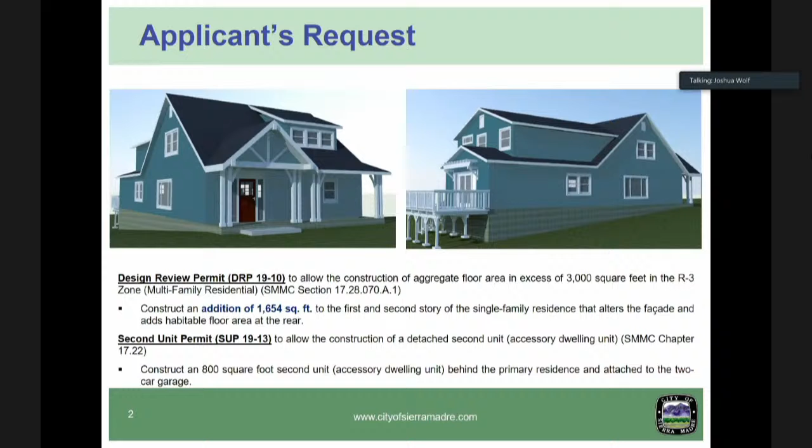Good evening, Commissioners. Tonight the Commission will be reviewing Design Review Permit 19-10, in conjunction with Second Unit Permit 19-13, for 170 West Montecito Avenue. Tonight the Design Review Permit will be contemplating the construction of an aggregate floor area in excess of 3,000 square feet on an R3 zone. The construction will include an addition of a total of 1,654 square feet to the first and second story of a single-family residence that alters the facade and adds habitable floor area at the rear. There will also be an accessory structure built for a garage, as well as the accessory dwelling unit.

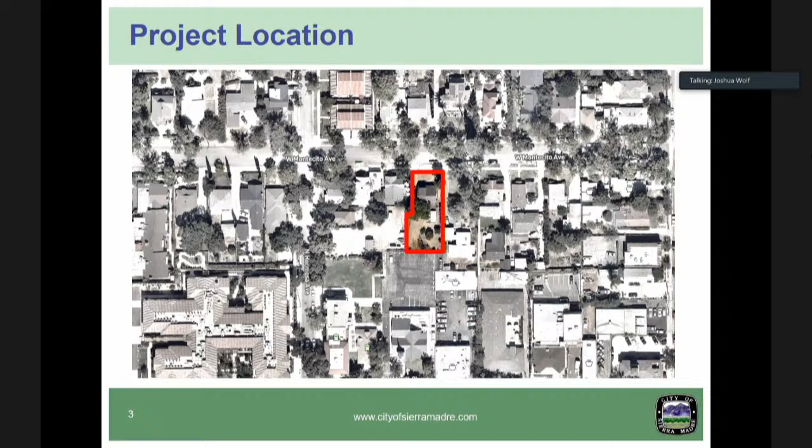Project location here on Montecito, close to the corner of Hermosa Avenue, just above the boulevard. Directly north of the old North Church at the parking lot, east and west of R3 zoned lots, and surrounded by commercial uses.

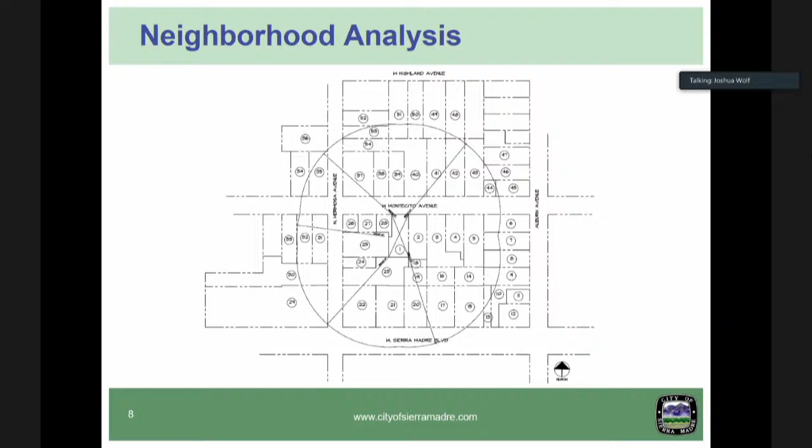So here we have the existing site plan, and as you can see towards the left of the slide, there's a lot of open space room for building. We have the wood deck here at the center of the property. This is going to be demolished and replaced with the area of the addition as well as a brand new deck. And as I pointed out earlier, there's a lot of open space area. There are two citrus trees proposed to be removed for the location and siting of the garage and accessory dwelling unit.

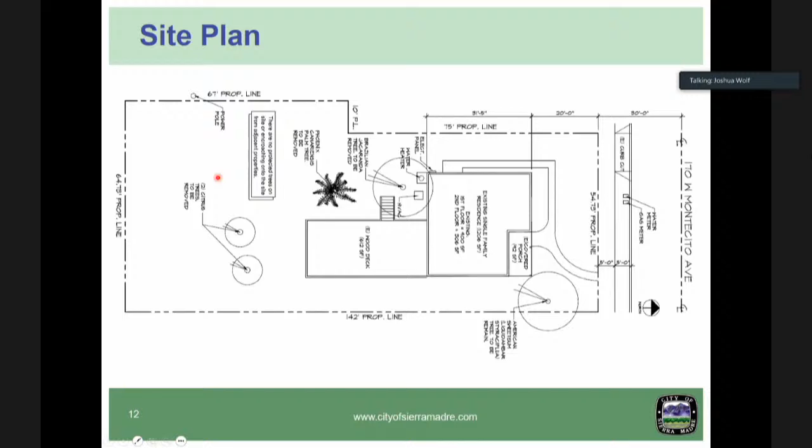And moving on, as you can see, we have the accessory structure here at the rear of the property, with the garage here at the end of a newly constructed permeable paver driveway. And we can see that the replacement of that deck at the rear is by addition to the residence as well as a new wood deck. I'd also like to point out that the existing front porch is going to be enclosed for living space, and then added on to that is a full width front porch.

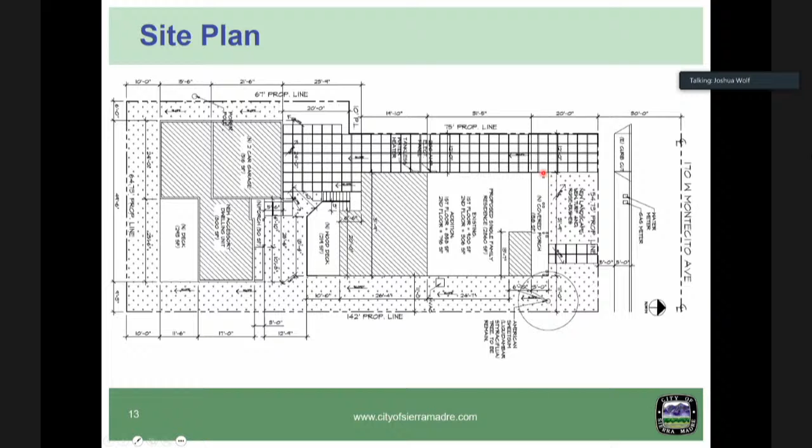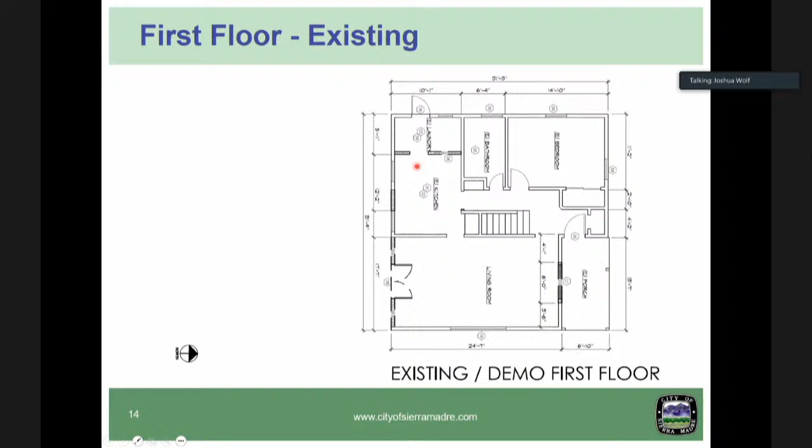So here we have the existing first floor, it's also a demo plan. It's a little bit hard to see, so I'll just try to describe this. What's being retained is the bedroom, bathroom, stairs, and portions of the living room. Basically this whole wall here will be demolished to make room for the addition. The kitchen is going to be completely new, and the laundry is going to be completely reconfigured.

So as you can see, beginning with the living room, we have an expansion towards a more open concept floor plan with the addition of a dining room and family room. We have the addition of a powder room here, pantry in conjunction with the reconfiguration of the laundry room. This also encloses the side entrance here. And then we have the all-new kitchen, and at the rear we have the new deck with the new stairs down to grade. At the front we have the foyer that was enclosure of the existing porch, and then at the front facade we have the new porch at full width.

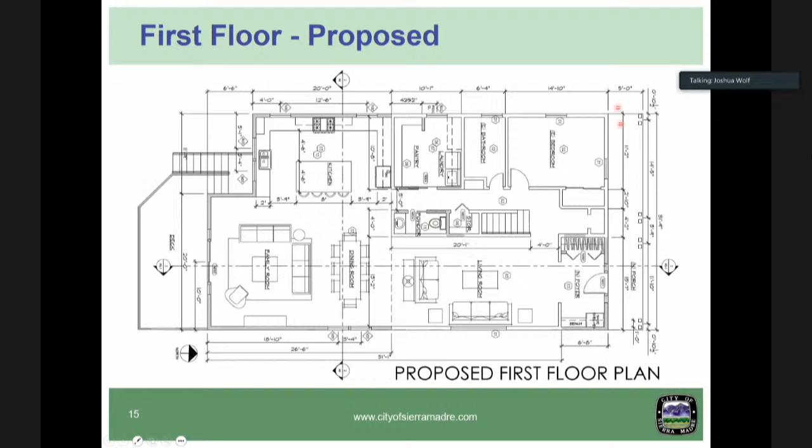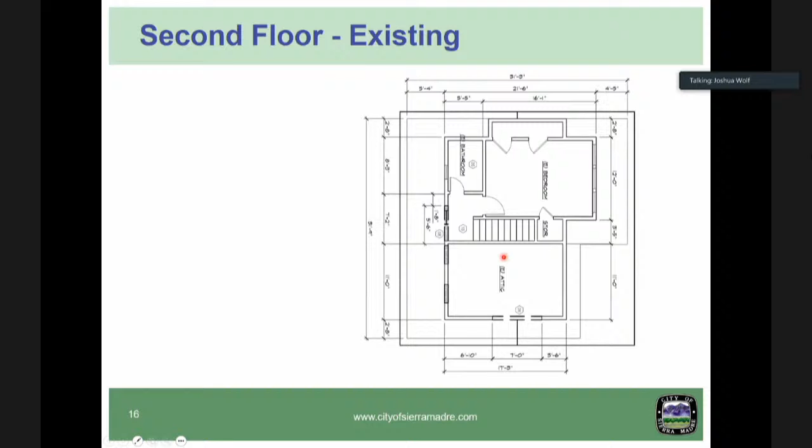From the second floor, most of what we see here is going to be retained. The bedroom here is going to stay existing. The bathroom will be enlarged, and the attic space will be converted for use as a bedroom. So here you can see this is expanded. The seating area here you can see is popped out, and the bathroom was enlarged to provide for sink space, and then the majority of the addition at the second floor here is for a master suite.

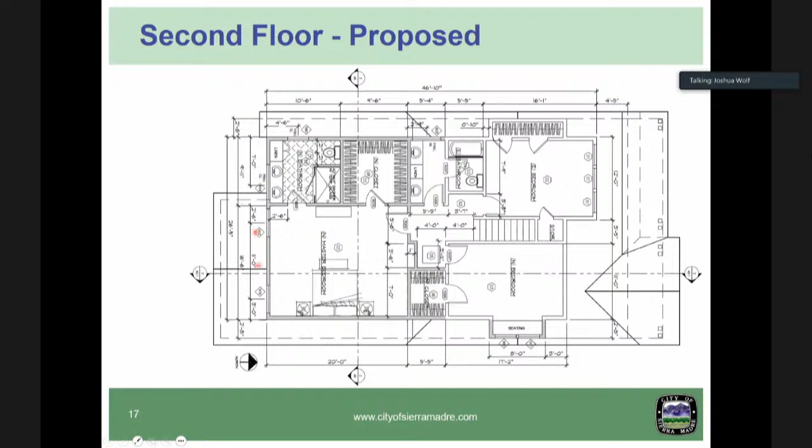Our north elevation shows existing conditions here, with a very large roof and a dormer pop-out for the bedroom at the second floor.

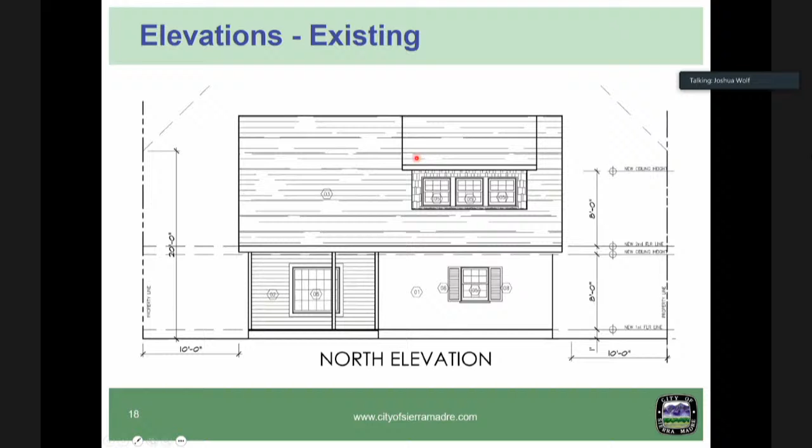Here is our new proposed north elevation, with material changes being stucco removed and replaced with vertical board and batten siding, shingles changed to horizontal siding, and new windows to match in style with existing. There will be all new windows and all new doors. Style will match existing, but everything will be comprehensively new, especially for the additions to match.

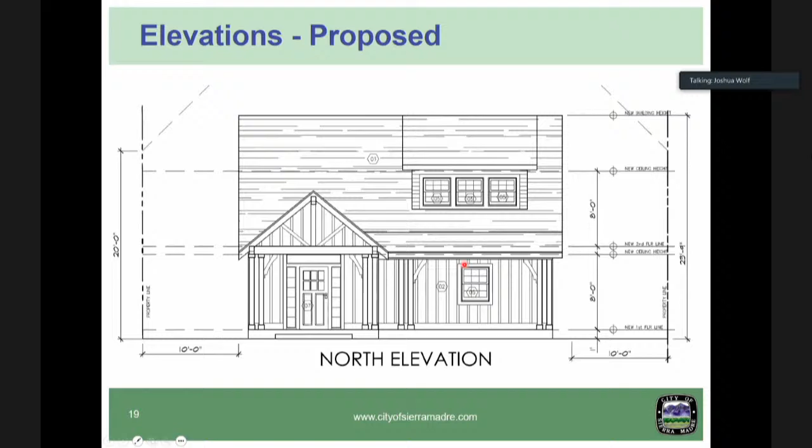From the west elevation, this is going to show the most dramatic change, here at the front. You can't see the porch here, but that will be expanded upon. Here we can see a deck, and the elevation would actually continue this deck a little further. Our proposed elevation expands upon that. So from the front we can see the expansion of that front porch here, and there is a gable end.

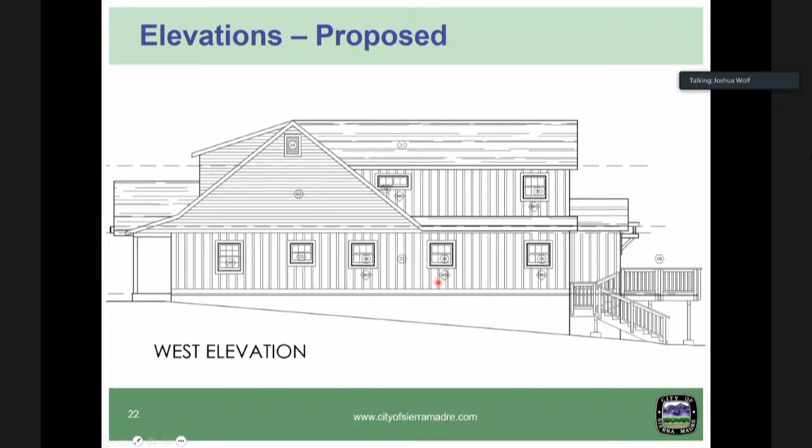And at the rear we have that entire second floor expansion along with the first floor expansion. And just a colored rendering of that elevation.

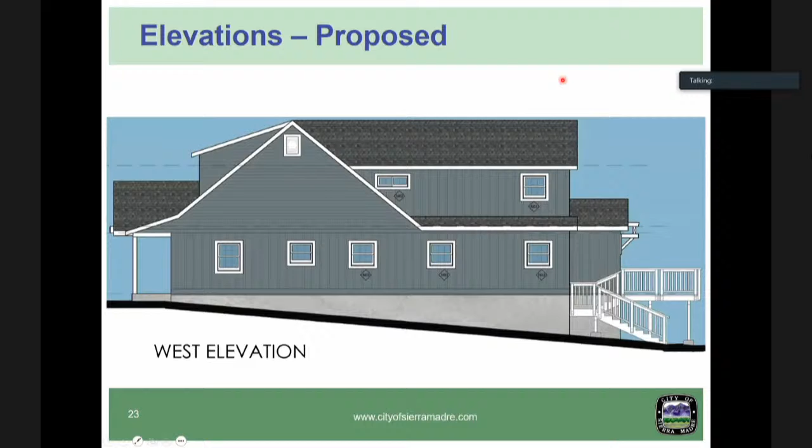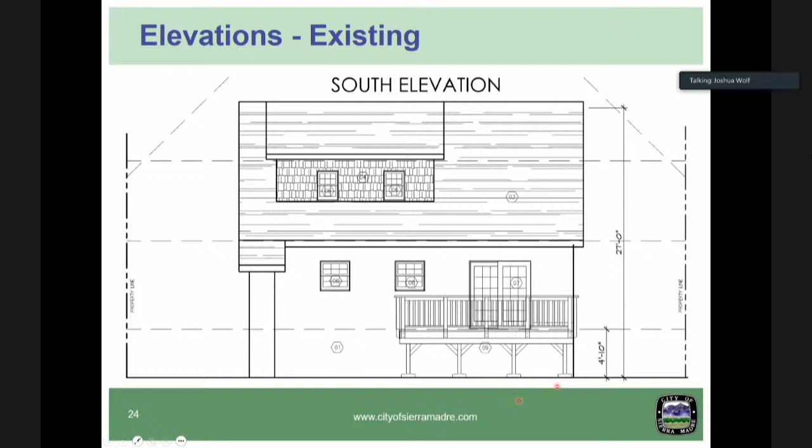Our existing south elevation, again we're going to be replacing materials here, stucco here, full demolition of this porch, and entire removal of this wall.

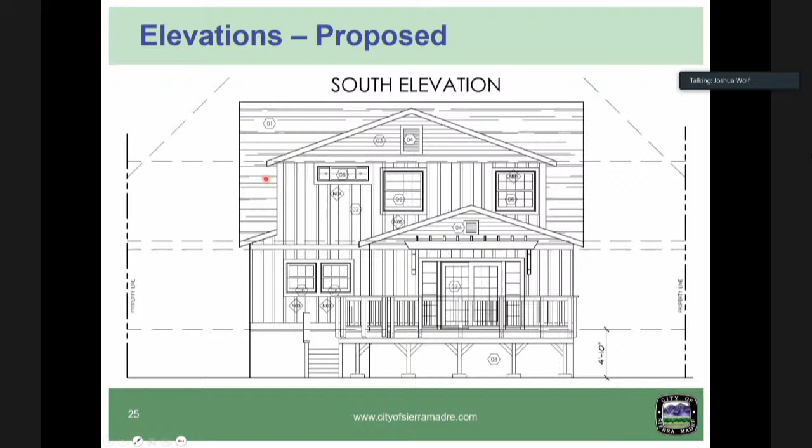As you can see, we have a new facade at this side. This will be a new porch entering onto the family room, with the kitchen on the left and master suite above on the second floor. And just a colored rendering of that.

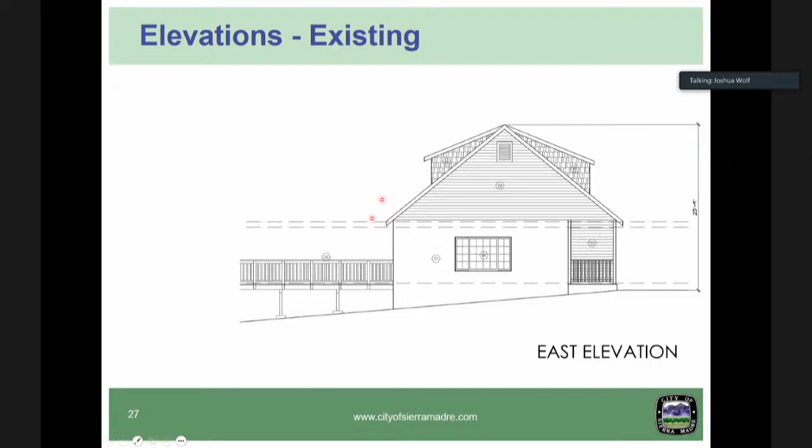Our east elevation, similar to the other side, here is where the living room is located. And here's where the existing porch is located, which will be enclosed. And of course we have the full addition to the rear, along with the new deck showing, and the front porch expansion. This space will be the dining room, and beyond will be the family room.

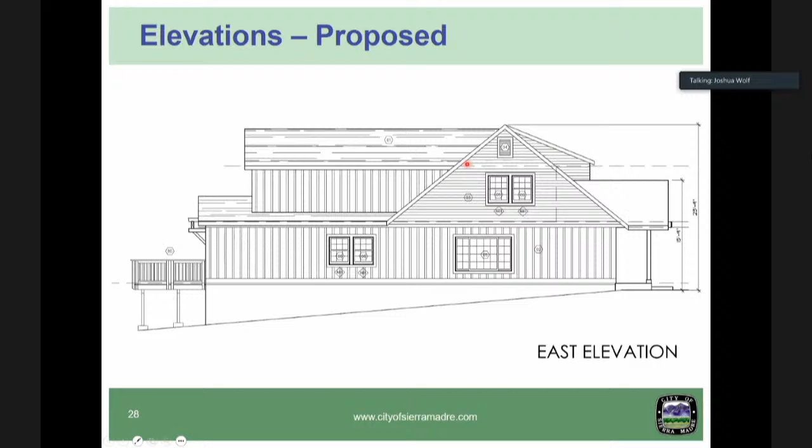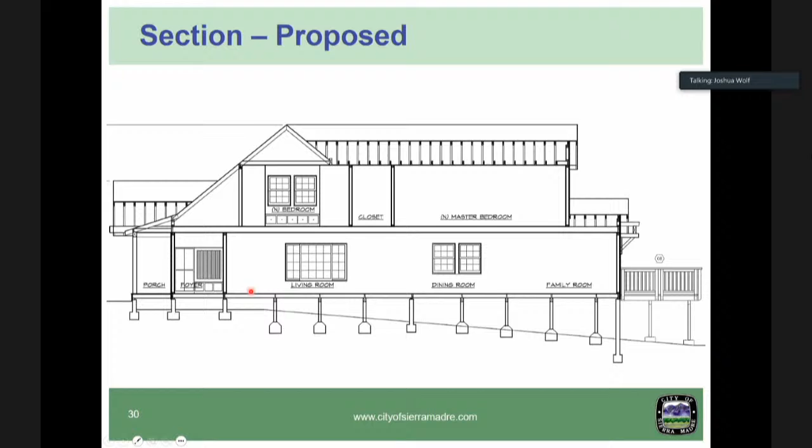So we have some cross sections here just to demonstrate the raised foundation, and another cross section here, more towards the south.

I'll also point out that the portion of this addition is 27 feet in height from grade to ridge of this roof. It's actually below the existing ridge of the roof, but because the grade changes here, it exhibits a greater height, which is compliant with R3 code, allowing for a total 30 feet height.

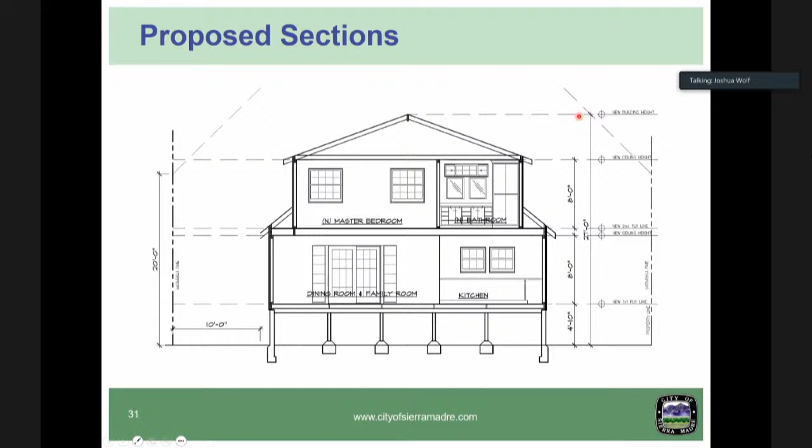And here we have the floor plan for the garage and ADU. The garage will accommodate 2 covered spaces, and the ADU is compliant with the standards, providing for bedroom space, kitchen space, and bathroom.

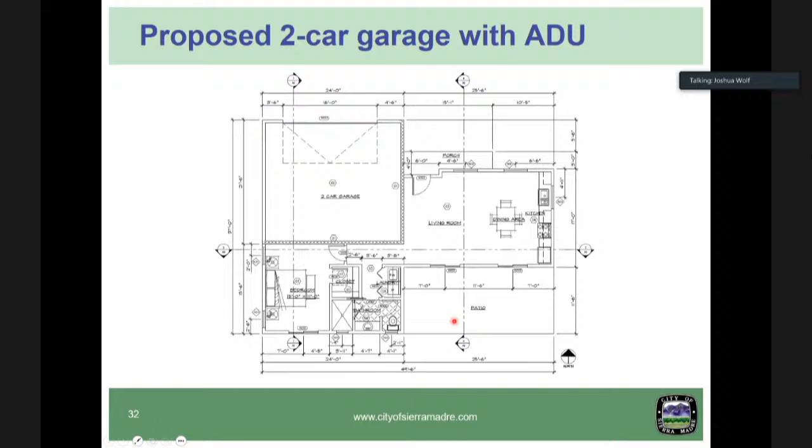Here we have elevations. This is the north elevation with entrance to the garage, door on the right with a garage door on the right of that elevation, and the entrance to the ADU at the center.

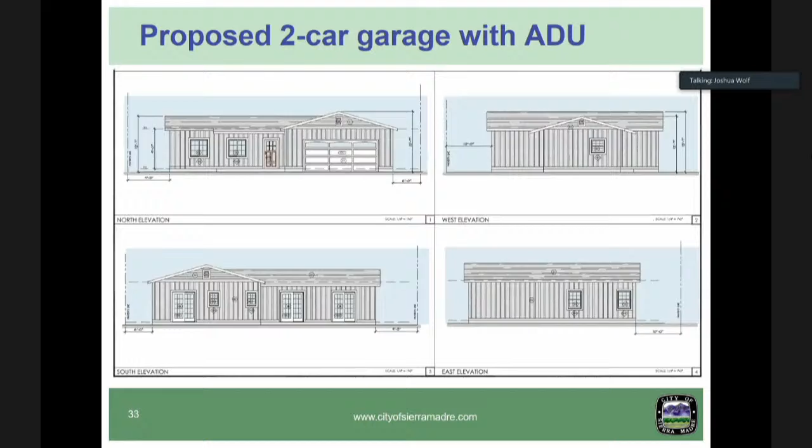West elevation showing here, east elevation on the bottom right of the slide, and then south elevation to the bottom left of the slide. And then just some colored renderings to show that all materials will be consistent with the design of the main building.

Here we have some 3D renderings to demonstrate more of what the project would look like. Front elevation showing open gable and front porch.

And to the side, here we have the rear where the deck would be opening into the family room. This part here is the living room.

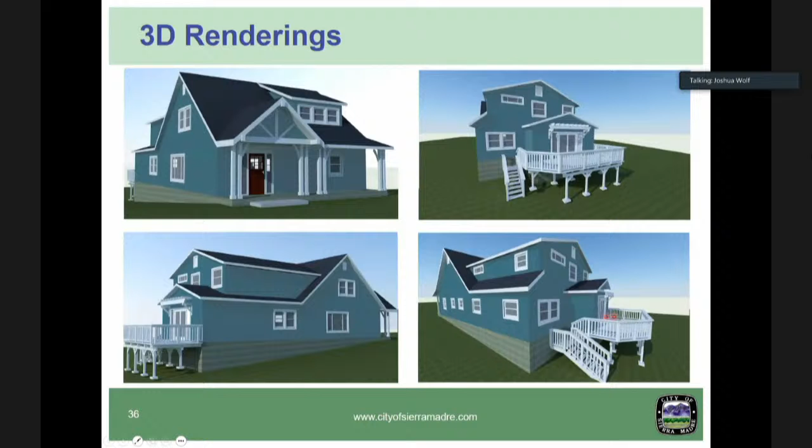And here we see more of the deck and its relation to the grade. On the bottom right, we have the other side, showing the extension of the addition.

So to make findings for the design review, the proposed project is consistent with the general plan designation of residential medium high density, and preserves and enhances the existing single family home. The majority of the project is located at the rear and will not unreasonably interfere with the use, possession, and enjoyment of surrounding and adjacent properties.

The proposal at the front will enhance the residential character of the neighborhood. The height, bulk, scale, mass, and siting of the proposed project is compatible with the existing neighborhood, landforms, and surroundings, in that the neighborhood contains a variety of uses and structure types.

The proposed two-story project reflects the scale of the neighborhood and does not visually overpower nor dominate the neighborhood, and is not ill-proportioned.

The proposed project, being 27 feet in height, neither unreasonably interferes with public views or the views and privacy of neighbors, nor does it produce unreasonable noise level or cause material adverse impacts.

The proposed project exhibits a comprehensive farmhouse style around all elevations of both structures, and each structure is consistent in style. The proposed project is not seeking relief from development standards, so finding 7 does not need to be made. Additionally, because this is an R3 zone property, I believe finding 8A through F does not apply.

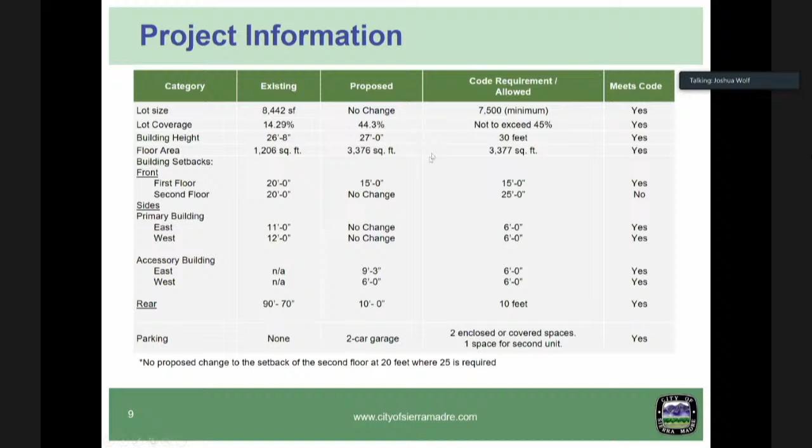So that portion of the project is within development code standards. However, the portion that exceeds that, which I don't believe would be contemplated, is the front porch and second unit, or accessory dwelling unit, as it's now called.

Well, why are we not counting the ADU? Our code is very clear that the ADU has to be within the square footage. If you look at code section 17.22.050A, the second unit ordinance, it says the total floor area of all buildings on the lot, including the accessory dwelling unit, shall not exceed the maximum floor area otherwise allowed in accordance with this title.

So we may have a different understanding. I can answer that question, actually. So because—go right ahead. Thank you. So under the state ADU law, subdivision E, it says that—

Oh, my lights turned off. It says that projects that are within 800 square feet or less, ADUs that are within 800 square feet or less, will be approved without regard to underlying zoning conditions. In this case, the project is 800 square feet, so it meets the subdivision E requirement. So we can't prejudice the project by applying that zoning standard.

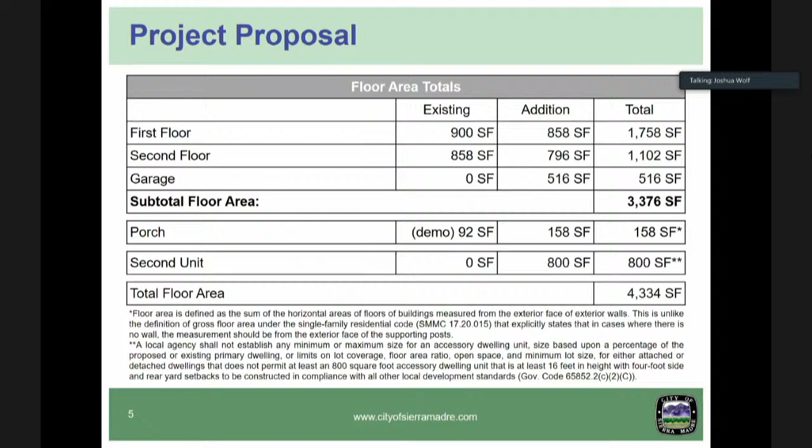Are there other questions of staff? Would the applicant like to make a presentation?

No, not at this moment. I'm the designer, Ricardo Figueroa. I think Josh pretty much explained everything that we're planning to do. I don't know if the homeowner has a comment.

Hello, I'm Lynette, the owner of 170 West Montecito. For the most part, we've been in the process trying to get this design and following every request that the city has asked us for the past 3 years. And we followed through closely with Josh, and from what we were told, we are within the zoning code. So I don't know what else is needed for us to move forward.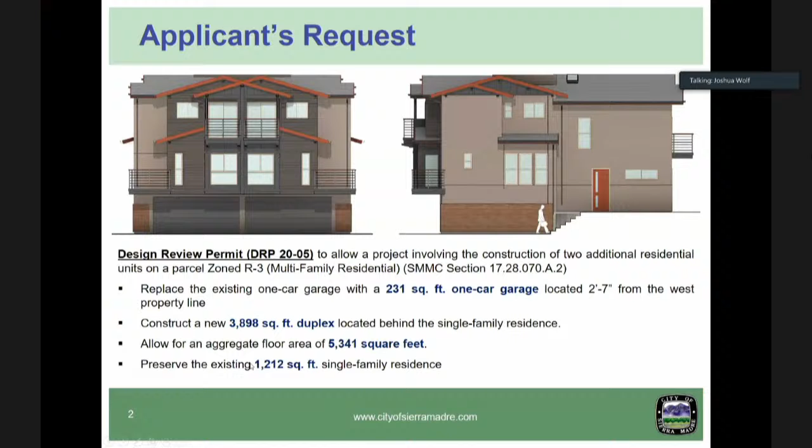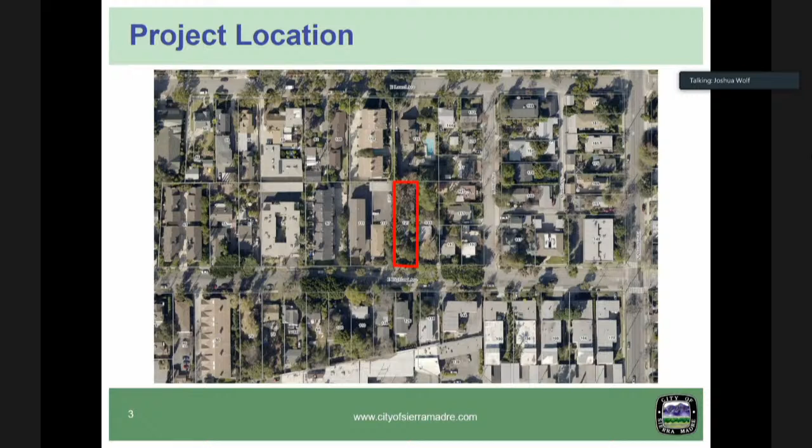The project is located on the north side of Highland Avenue, east of Baldwin, and near the intersection of Merrill Avenue, closest major street being Mountain Trail Avenue. All properties surrounding are either R3 residential or 2-family residential, noted here by the golden zones.

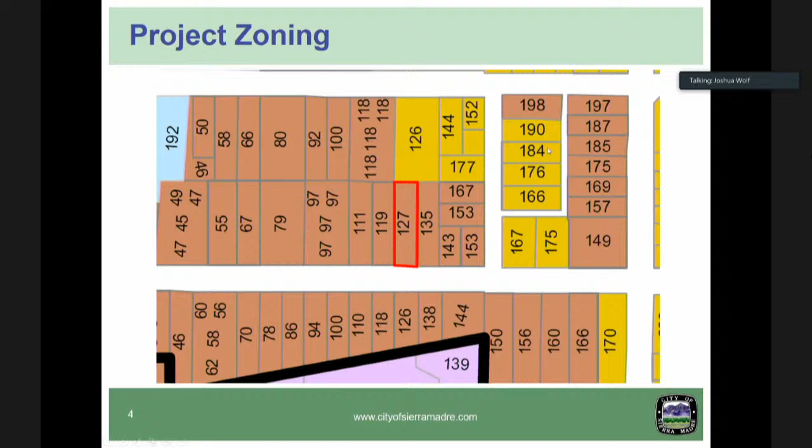So in summary, the project will be preserving the single-family residence. The existing garage will be demolished and rebuilt at 231 square feet in a different location. This leaves us a total of 1,443 square feet here. The 2-family duplex residential area of 3,063 square feet with garage total area of 835 square feet, for that subtotal area of 3,898 square feet, all in total of 5,341 square feet.

At the north end, we have a 2-family residential property. There's substantial vegetation and a high fence to aid in the mitigation on privacy. As in the east, there's cypress trees here to help with impacts on privacy. To this property, there is a single-family residence.

On the south end is the remainder of the property. There is an oak tree there. This oak tree is proposed to be removed with the approval by the Public Works Department on a mitigation of a 5-to-1 replacement ratio, with location to be determined by the Public Works Department.

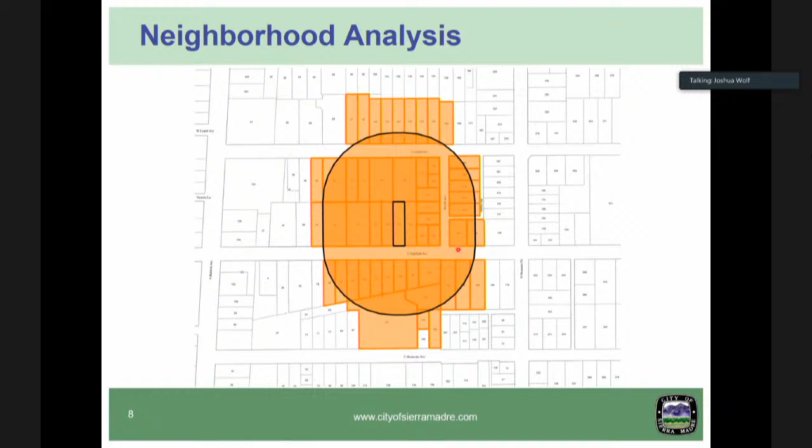And like our last project, the neighborhood analysis will include a variety of not only single-family but multifamily residences, and some industrial areas here. The problem with the neighborhood analysis is that it includes the square footage for units on multifamily residential areas, and it was very difficult to come to a conclusion on the total square footage per property and comparing that to total square footage on this property, also comparing square footage of each unit to each unit where there's also single family units. So this is largely disregarded as part of fitting into the neighborhood, and we'll look more at the design of the project.

So I suppose I should go at this more in depth. So our lot size is not changing. It is a tier 3 lot, 8,500 to 11,000 square feet. Building coverage does allow for 60%. Normally this would allow for 45%, but because they are incorporating permeable pavers, they are allowed an allotment of an extra 15%, so that they can go up to 60%. They are only reaching 57.9%.

Building height, they are allowed 30 feet, and they are building to 30 feet. Their floor area ratio, they are allowed 55% or 5,267 square feet. As you can see, it does not meet the code. This is a difference of roughly 75 square feet or 0.7% above what is allowed.

As for the setbacks, our front is not changing as part of the effort to preserve the existing single-family residence, where they are otherwise allowed 15 feet at the first floor and 25 feet at the second floor. From the sides, they only need 10% of the lot width, or 5 feet from each side. They are providing, for the duplex itself, 5 feet and 1 inch from each side. However, for the one-car garage being built for the existing residence as a replacement, it is only located 2 feet 7 inches. This is due to the fact that it would otherwise not work in that location.

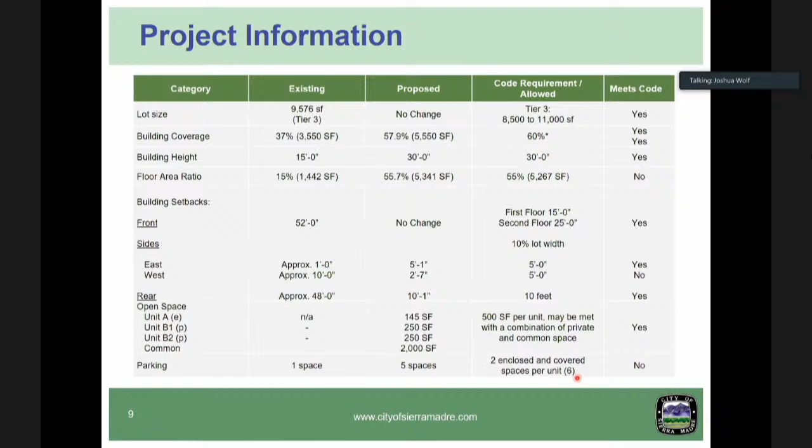I just outlined the same kind of relief of development standards for the preservation of a single-family residence on the site. The Commission can consider some relaxation of setbacks and other zoning requirements for that purpose.

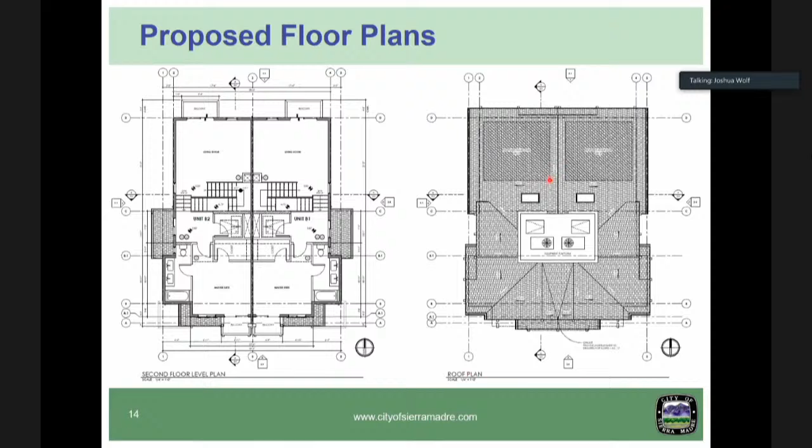For our elevations, we start with the potentially most publicly visible elevation, the south elevation, where we can see more of what the architectural design looks like.

The choice in colors for the overall building was selected in an effort to work in harmony with the existing single-family residence while also utilizing earth tone colors. A modern craftsman style was selected so that all buildings on the property would appear to be one cohesive design, while still allowing room for differentiation through use of materials.

The majority of the building is clad in stucco of a light tan color, and all portions of the roofs, except where the mechanical platform and solar panels are located, will utilize gray composition shingle. These materials will blend into the surroundings while offering visual interest through different uses of materials.

First with the brick veneer wrapping the garage at the lower level. Next with the horizontal siding here as a darker color. Then with the board and batten under the gable ends on the roofs. And lastly, the more striking feature of the red trim fascia board.

This provides focus for the center and the top of the structure.

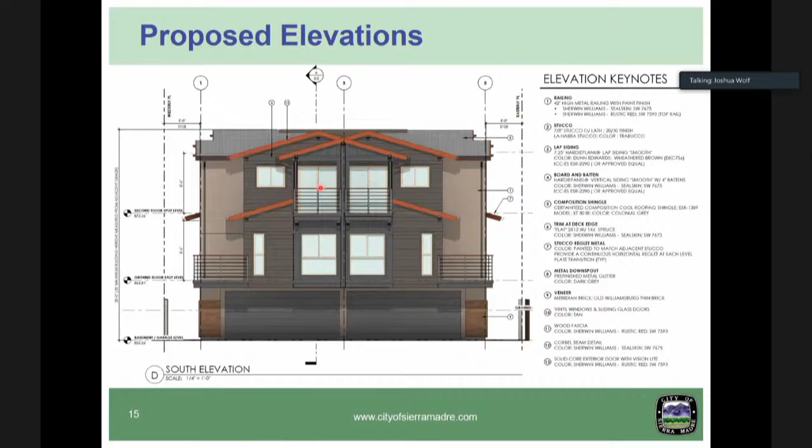At our side elevation, we can see the continuation of the wrapping of that brick veneer, continuation of the wrapping of that horizontal siding for that southern projection, and mostly clad stucco siding for that side. We can also see that the front door is the same consistent color with that trim to provide some extra visual interest here.

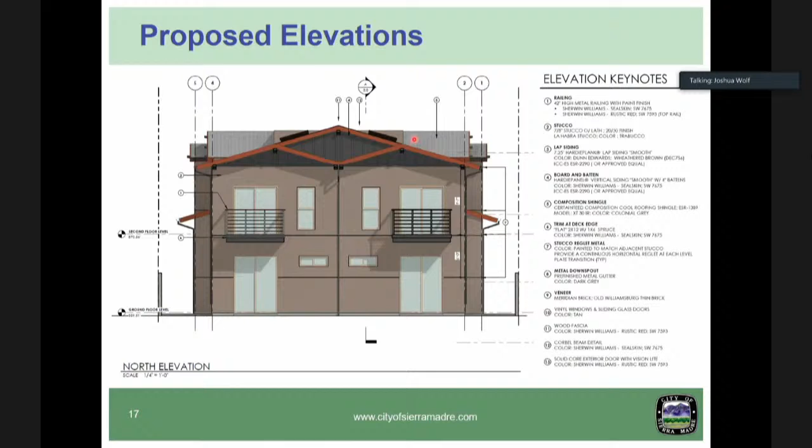On the north elevation, which is probably going to be the least publicly visible, we have continuation and consistency with materials used, board and batten under the gable ends, and stucco on the siding, as well as the red trim fascia board. The other side is just a mirror of its other side, using the same kind of materials, same wrapping, everything, showing a continuation of full wrapping of that siding as well.

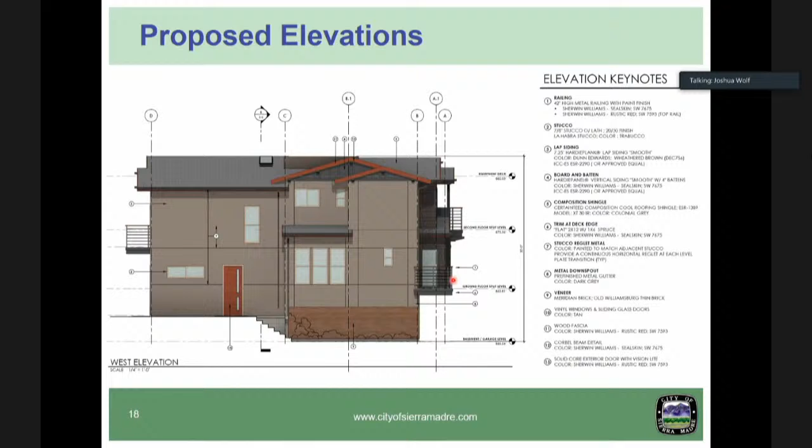From a section view, we can better demonstrate what each floor looks like. From that 2-car garage, you may have noticed there was a little alcove space here. This wouldn't be counted as floor area as it is only 3 feet 3 inches from that level to the ceiling, so it is just storage space in there. And again above, there's nothing below the room, it's just the room being demonstrated on that floor plan.

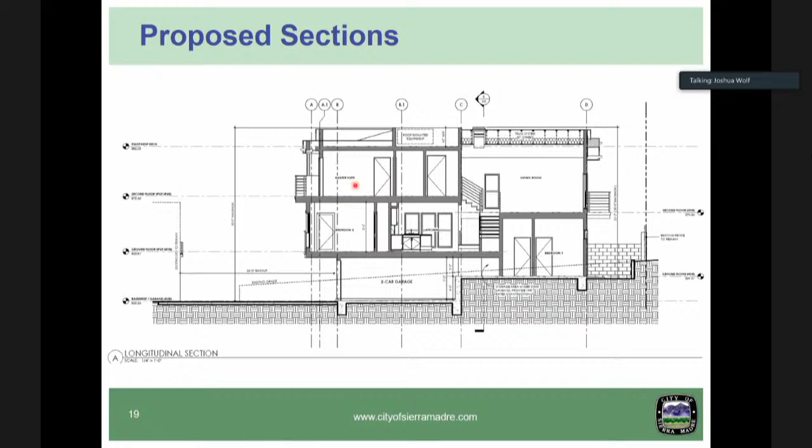Moving up another half level, we have that kitchen dining area with bedroom. Another half level, the living room, and then the final level, the master suite. From a cross section here of the transverse section, you can kind of see more of what the stairs configuration looks like.

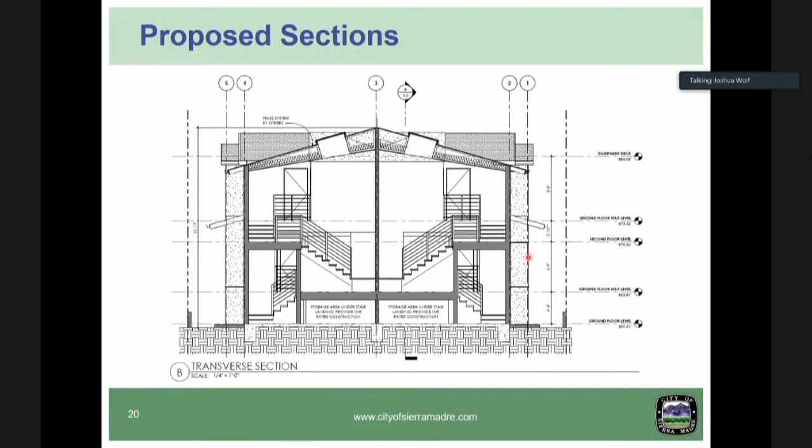And then just wanted to provide some extra detail for that garage being added to. It is also going to stay consistent in style to the building it's being attached to, as well as consistency in complementary features with the duplex being added.

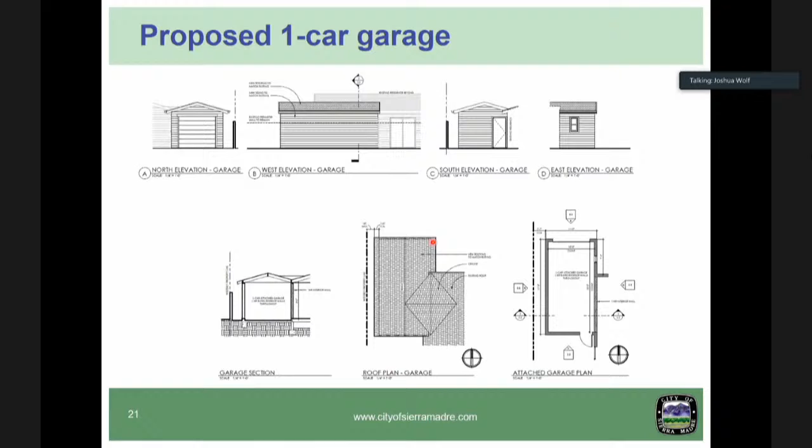Just some more detail to each material being used: a composition shingle gray for the roof, a board and batten siding for the areas under the gable. It's a little bit darker than the lap siding used at the southern projection. Light tan stucco, brick veneer, and then vinyl windows for use throughout all windows, and sliding glass doors.

Here we can see kind of a massing study. What was done by the applicant was to insert a 3D model of this within Google Maps to try to give some context for the surrounding area. Obviously, as we've seen from pictures, this is a little bit different of a situation where there's a building here. But this kind of remains the same, and you can kind of see it does pretty much fit within at least this context to the west.

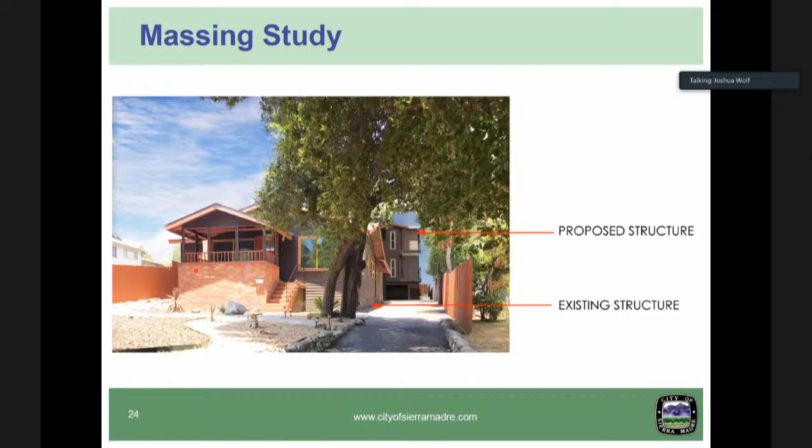From a front elevation, this is kind of what you would see as a rendering, but I have another image here ahead where you can see more detail from at least the driveway of what it would look like at street level, and also with a comparison of the existing single-family residence. And just some more 3D renderings to show you what it would look like, with some more context to its surroundings.

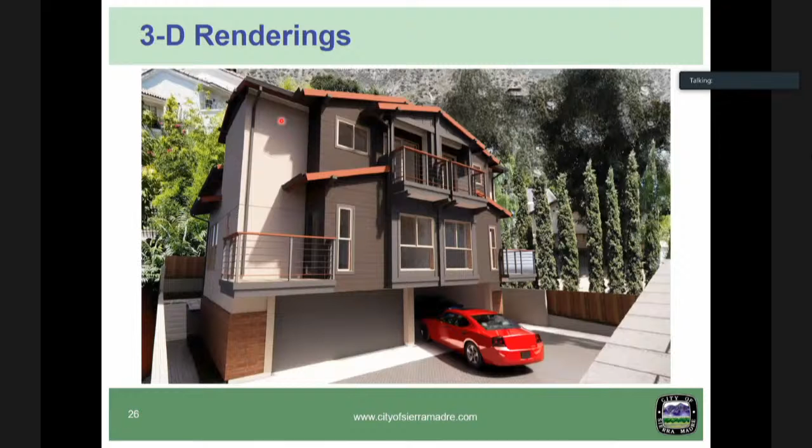So for this application, the following findings need to be made: that the proposed project is consistent with the general plan designation of residential medium-high density, as the project preserves the existing single-family residence. The proposed project is in the rear with little visual impact to the public view and will not unreasonably interfere with the use, possession, and enjoyment of surrounding and adjacent properties. The height, bulk, scale, mass, and siting of the proposed project remains similar to the existing residence from public view and is compatible with existing neighborhood, landforms, and surroundings.

The proposed project - I'm sorry, that should not say single-story project - reflects the scale of the neighborhood and does not visually overpower or dominate the neighborhood and is not ill-proportioned. The proposed project does not unreasonably interfere with the public views or the views and privacy of neighbors, nor does it produce unreasonable noise levels or cause material adverse impacts.

The proposed project exhibits a modern craftsman architectural style, is a coherent project-wide design, and is complementary to the existing single-family residence, especially in areas where it is not visible from the public view. And finally, the proposed project is not actually seeking relief from development standards for additional height, although it is seeking development standards for different reasons.

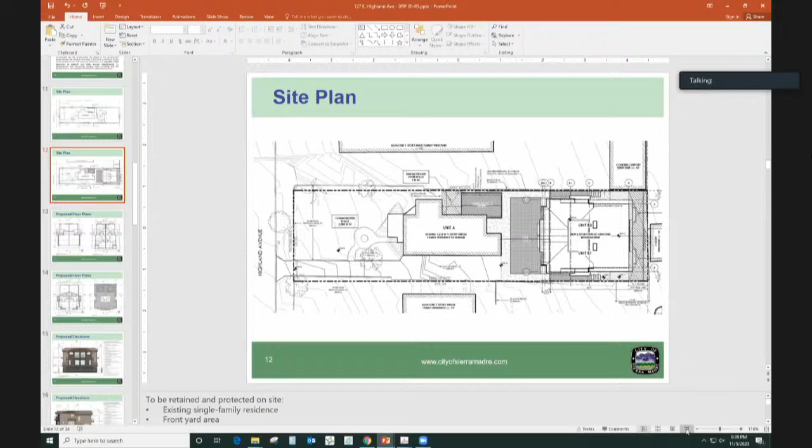Let me see if I can pull that up. So this shows 26 feet backup space. I'll try to point that out here. It's a little bit hard to see, but this does point out 26 feet. This is on sheet 1.0 of the staff report in attachment D. I'm sorry, not 1.0. I found it, thank you. Okay.

Any other questions for staff? I have a question. The parking, they need 6 spaces to be compliant. What options were considered? I'm not sure of the code as far as parking in the front. Could they do that? Because they seem to be set back quite a ways.

So the required front yard setback for R3 properties is 15 feet at a 1-story level, so there could have been consideration for parking in this area. However, the applicant and staff feel that this would not be characteristic of a single-family property, and it would not work towards preservation of this existing unit.

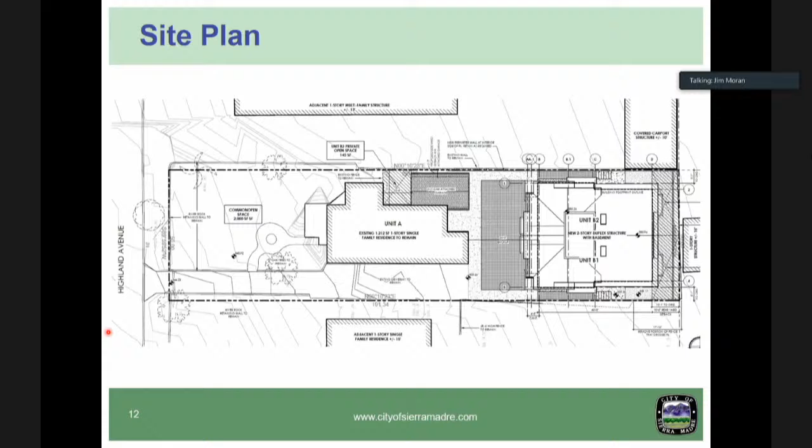Good, yeah. My name is Jim Moran. I work for Wilkins Family Construction as a project manager. We acquired this property with the intention of using the R3 code that allows some wiggle room to try to make some density happen on a rental property.

So this isn't for sale, it'll be like a triplex for rent. Working with staff, we determined that it would have been difficult. We did explore using the front more. There are 3 oak trees in the front, and there would be some grading issues where there's some original cobblestone walls and such.

So we kind of came to the conclusion that we would try to see what we can do in the rear. We did ask for the 1 tree to be removed with mitigation, and it seems like we worked through that. Working with the lead designer with the architect firm, I think we came up with a really good design.

I did send out letters to all the surrounding property owners and got 2 responses. Importantly, the 2 that are single families—the gentleman and his wife in the rear home have a beautiful craftsman home up on Laurel. They came to the property, and they gave their thumbs up on the project.